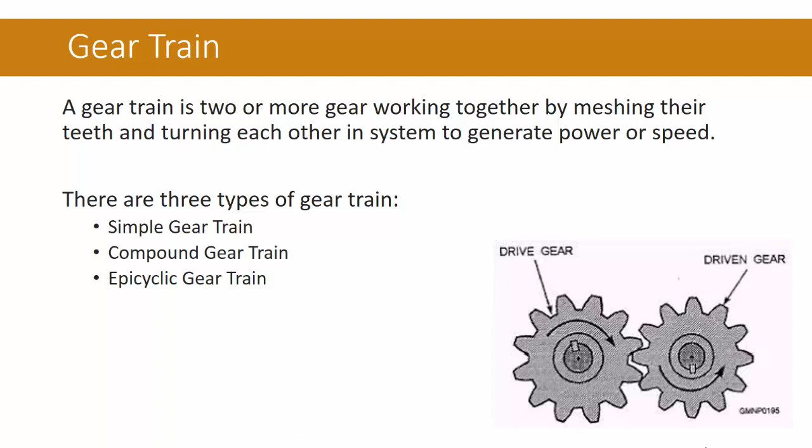Simple gear train. The most common type of gear train is simple gear train. In simple gear train, the gear pair is connecting the two parallel shafts. The teeth of these types of gear train can be spur, helical, or herringbone. The main limitation of simple gear train is that the maximum speed change ratio is 10:1.

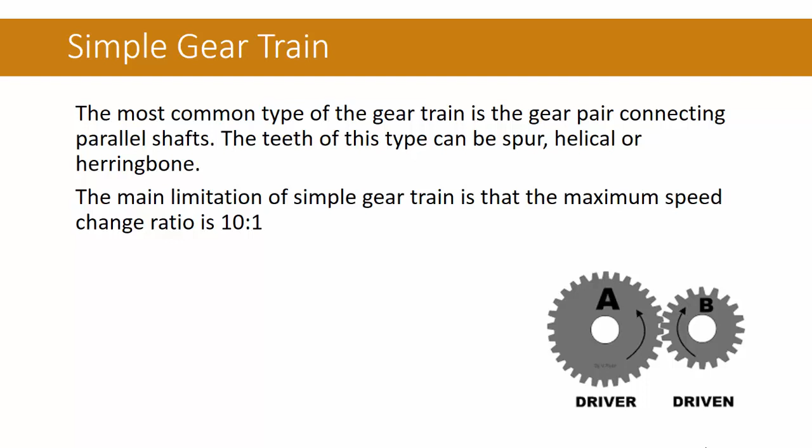Compound gear train. When there is more than one gear on a shaft, it is called compound gear train. A compound gear is a number of gears fixed together. Consequently, they rotate at the same speed, as both the gears are mounted on the same shaft. An example can be seen below. The gears that make up compound gear usually differ in size and have a different number of teeth. The gear train below has an arrangement of gear wheels including one compound gear and one simple gear.

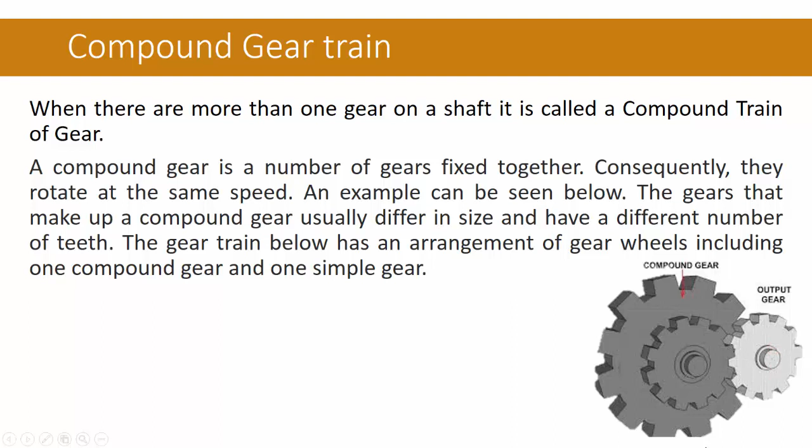Epicyclic gear train. It is made of a few components: a gear at the center called the sun, several medium-sized gears called the planets, and a large external gear called the ring gear. The planet gear rolls and revolves around the sun gear, and the ring gear rolls on the planet gear. These types of gear train have higher gear ratio.

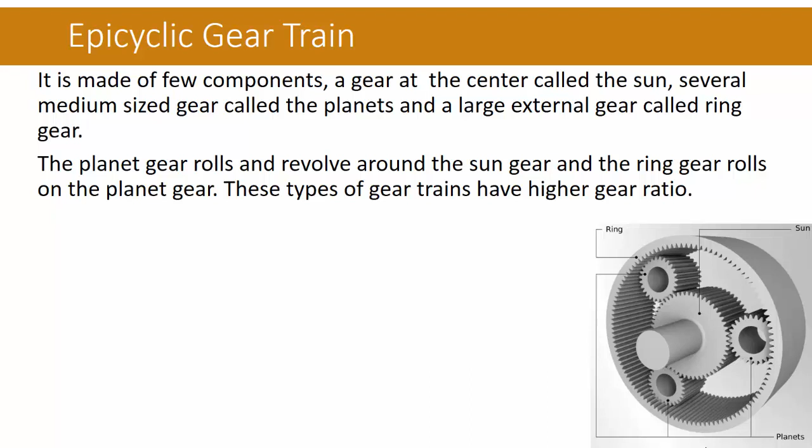In many epicyclic gear train systems, one of three basic components is held stationary, and out of the two remaining components, one component is input that provides power to the system, and the remaining last component is an output that receives the power from the input. In our case, ring gear is stationary, sun gear is input, and planet carriers are output.

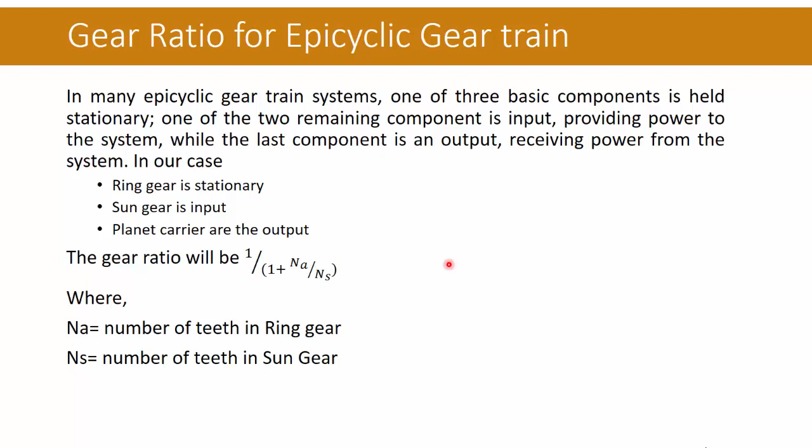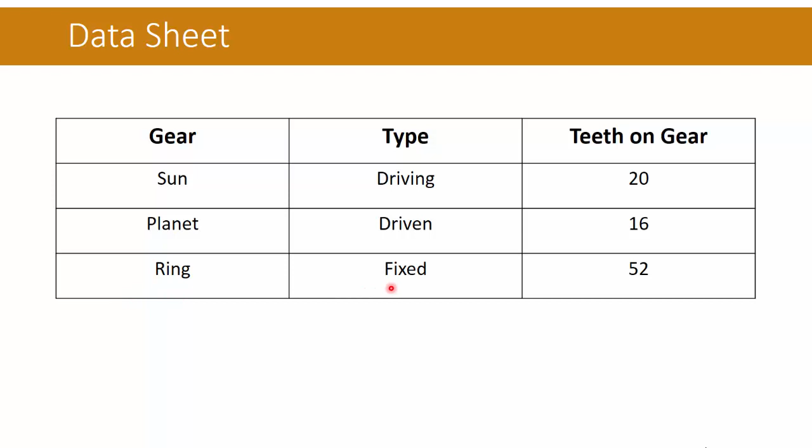The gear ratio of the epicyclic gear train in our apparatus is 1 / (1 + NA/NS), where NA is the number of teeth in ring gear and NS is the number of teeth in sun gear. This is the data sheet of the apparatus. Sun gear is the driving gear and has 20 teeth. Planet gear is the driven gear and has 16 teeth. The ring gear is fixed and has 52 teeth.

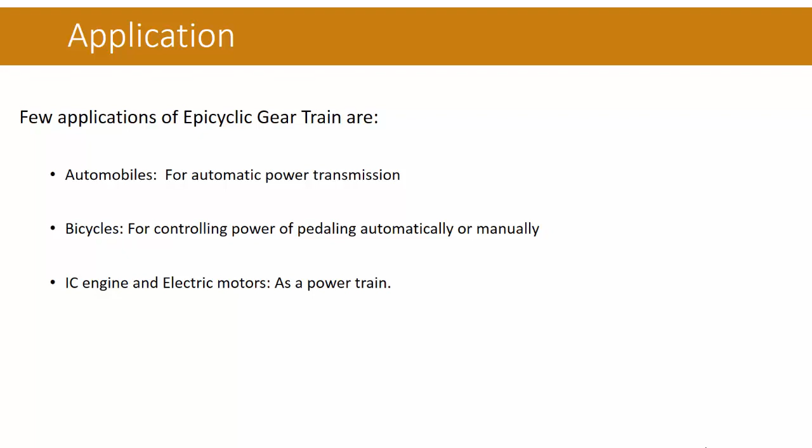A few applications of epicyclic gear trains: automobiles. In automobiles, it is used for automatic power transmission. Bicycles. In bicycles, it is used for controlling power of pedaling automatically or manually. In IC engines and electric motors, it is used as a powertrain. Apparatus description: sun gear, ring gear, planet carriers, dial scale.

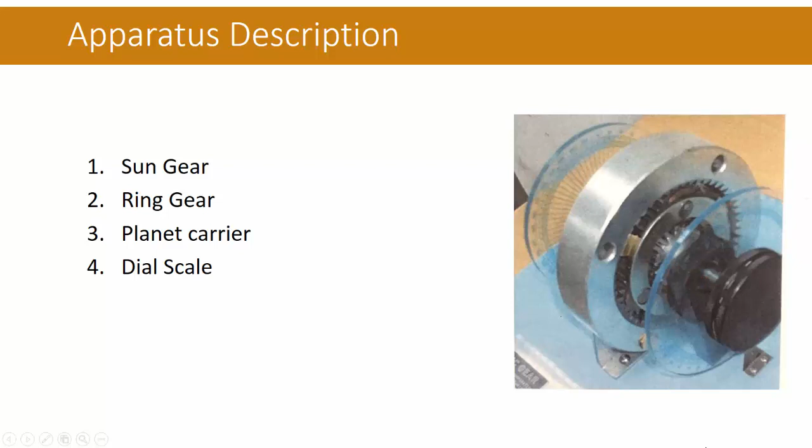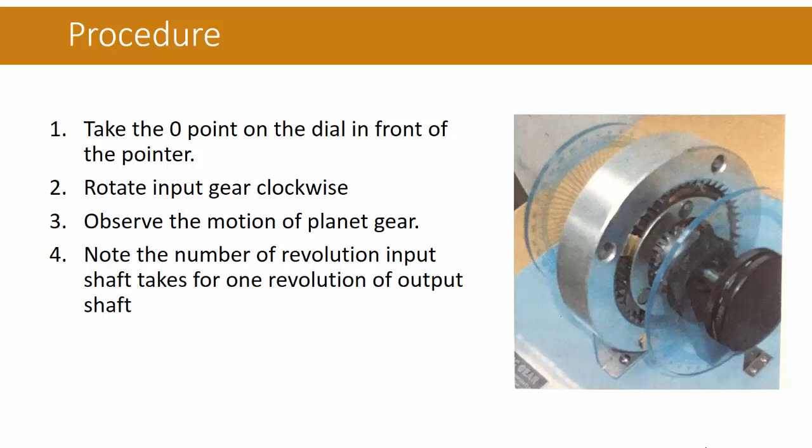Procedure: take the 0 point on the dial in front of the pointer, rotate input gear clockwise, observe the motion of planet gear, note the number of revolutions of input shaft that it takes for one revolution of output shaft.

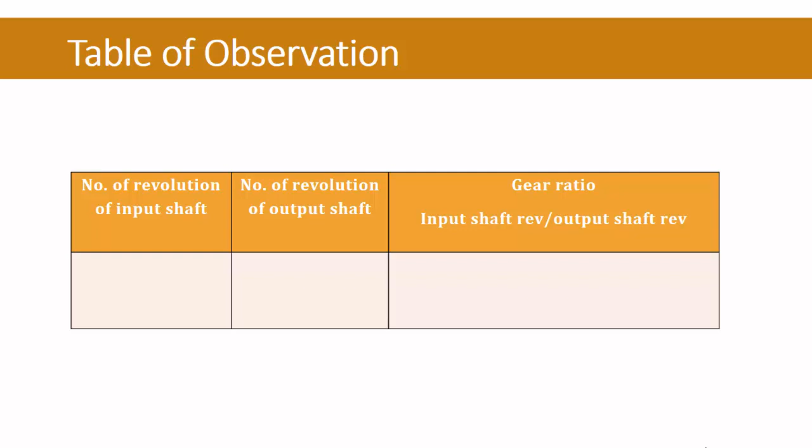Table of observation: it has 3 columns. First one is number of revolutions of input shaft, second is number of revolutions of output shaft, third is gear ratio. Gear ratio is input shaft revolution over output shaft revolution. It is the experimental value of gear ratio, and you will compare it with the theoretical value of gear ratio that we have derived in the previous slides.